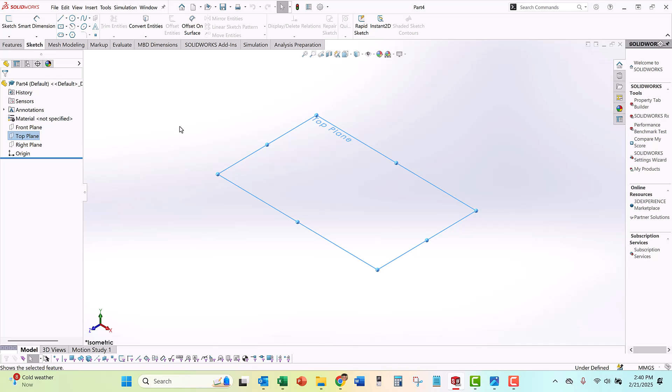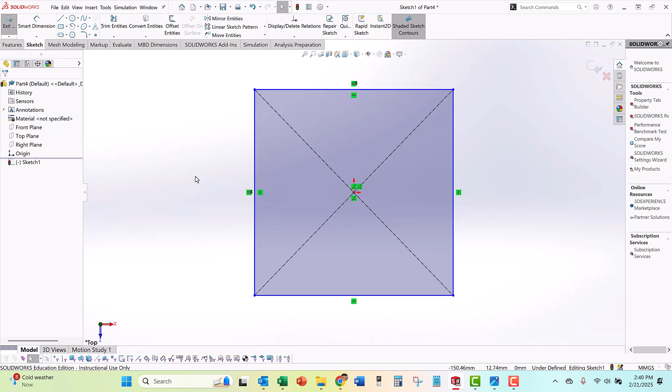So I want to go select this top plane. I want to sketch on the top plane so the part's oriented correctly. And I'm going to go do a center point rectangle and approximate that. And I want these to be a square, so I want to make those 2 equal. So I select one, control click the second one. Now they're equal. Now I don't quite know what size I need yet. And so I'll worry about constraining that later, but I want to make sure I don't forget later. So we'll call it good with that, and I'll get it out of the sketch.

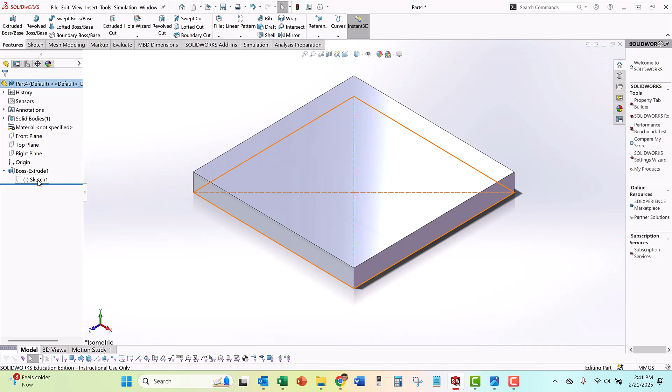And I'll do a space bar and do an isometric view. And I think now I'll extrude it to make my plate. And I'm not sure what thickness is going to be, but I'll pick a thickness and say okay. So like I said, eventually we're going to go back and fix that sketch so it's got the right dimension on there that we want. And eventually I'll assign a material.

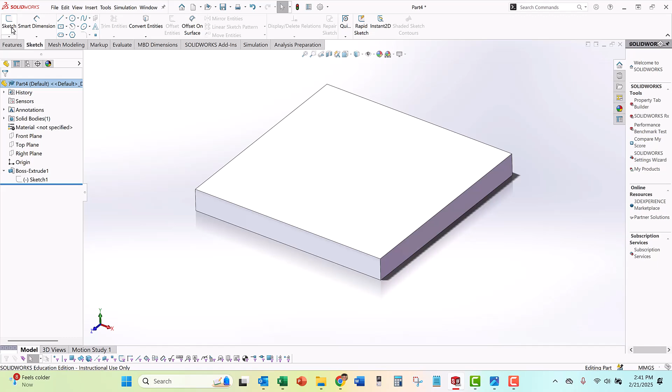Alright, so I want to make a sketch to kind of locate all my features. I got a bunch of holes, and I want to create a sketch that's going to control the location of all those holes. And so I want to make a new sketch. I want to sketch on this face right here, and I want to make me a diameter bolt circle. And that looks okay. And I'm going to make some lines here to help me locate the different types of holes at the different locations.

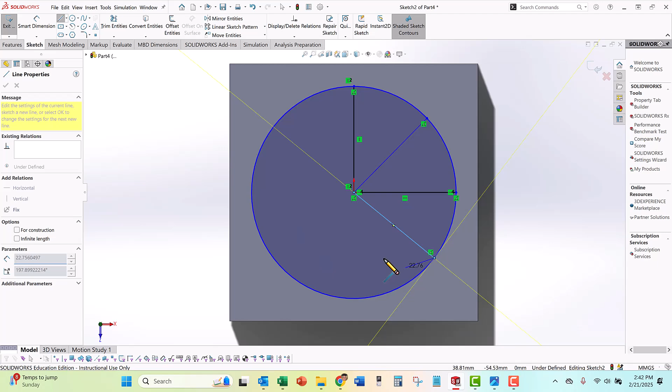And so I'll have a vertical line at 12 o'clock, I'll have a horizontal line at 3 o'clock, and then I'll have a couple of 45-degree lines that I'll use to locate my holes that need to be halfway between those other 2. So I'm selecting, put them at the origin, make sure I tie them to the circle, and so when I move this, they're all moving together, so that looks good.

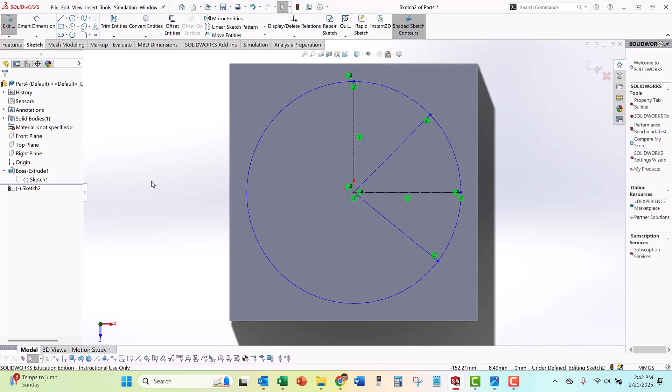All of this needs to be construction geometry, because I'm not going to extrude any cuts or anything. I just want to use it to control other features. So I select one, control click the rest of them, make them all for construction. And again, I don't know what bolt circle size I want, so I'm going to leave that loose for now, but I got to constrain these. I do want to put angles on here. So here to here, this will be a 45-degree angle.

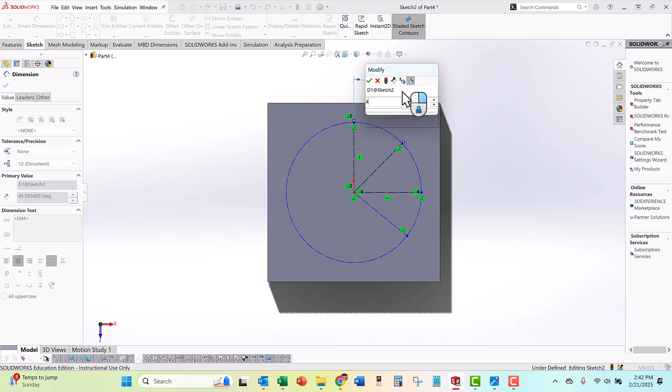And I could do another 45-degree angle down here, but I think I'll do some geometric constraints. So I'll select that line, control click, whoops, got the face instead. Select that line, control click that line, make those perpendicular. So now those lines are fixed. One thing I need to do later is put a dimension on this sketch. So I'll leave it loose for now.

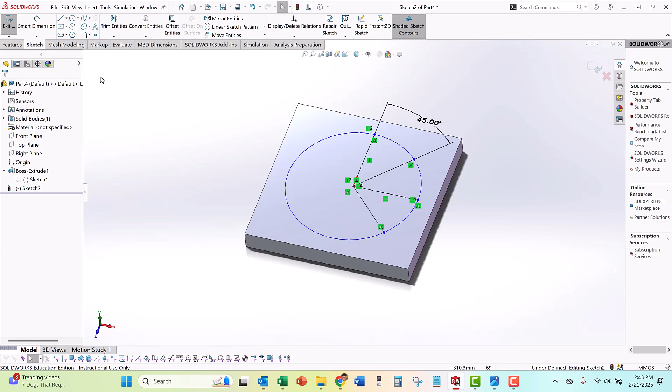Also I want to make a square on here so I can locate those corner pins and the clearance holes for that hex bolt that goes through there. So I want to do one more. I want to look down from the top again, space bar, top view. Do another center point rectangle and select the origin and place it something like this. And again, this needs to be equal to this. Make them equal, also make them for construction. So that looks good.

And so what I've got is a design rule I like to use, which we talked about 3 weeks ago: the edge distance for the holes, you need to keep it no closer than 1.5 times the major diameter. So I want to go ahead and make a global variable to drive those dimensions. And so I want to go Tools, Equations, and I want to call it Edge. And I'm going to look at my hex bolt size, and for mine it's a 12 millimeter screw.

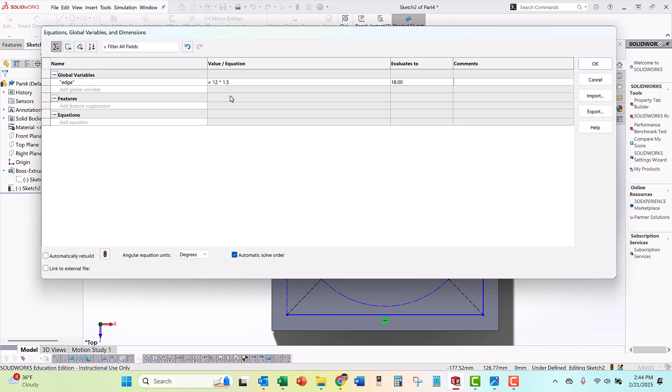So I want to say equals 12, whoops, got too many equal signs, equal to 12 times 1.5, because my major diameter is 12, and I want to make sure the edge distance is at least 1.5 times that. So now that I've got that variable defined, I can go smart dimension, and I can go from here to the edge of the part, and I'm going to type in equals. That'll get this pop up. I'll arrow down to go global variables, and I'll arrow over to the right and select that global variable.

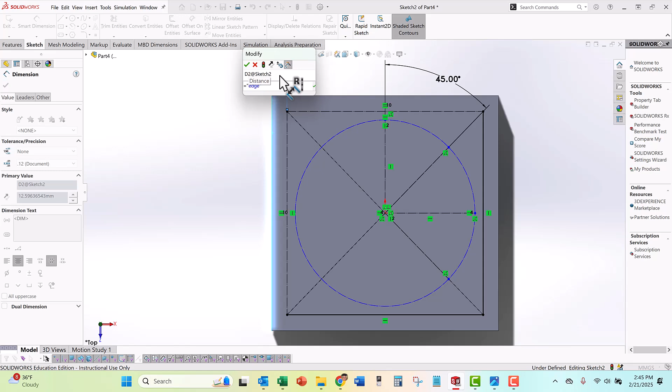So now that dimension, you can see it's 18 now, but it's got that sigma on there. That tells me that it's being driven by that global variable. So I'm going to do that in this other direction here. Again, say equals. Well, that one doesn't need to be on there because it's already defined because these things are equal. So I believe now that took care of the, everything is black.

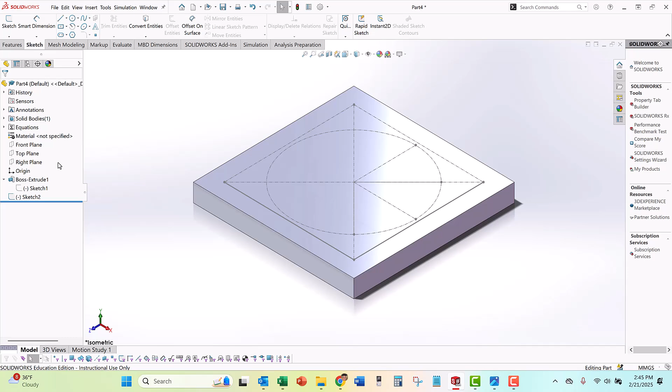The only thing that is not defined is the diameter there. So I'll tie that down later. So I'm going to exit there. So now I've got me a sketch that'll help me control all the different holes I'm going to put on there here in a little bit.

All right, so now let's go ahead and I'm going to say I'm working on the bottom plate. And so on the top plate we had counter bores here and here, 12 and 6. We had countersinks here and here at 3 o'clock and 9 o'clock. And then the threaded holes were on these 45-degree angles. On the bottom plate, that whole pattern needs to rotate 45 degrees so that the holes on the top don't crash into the holes for the screws going up the bottom.

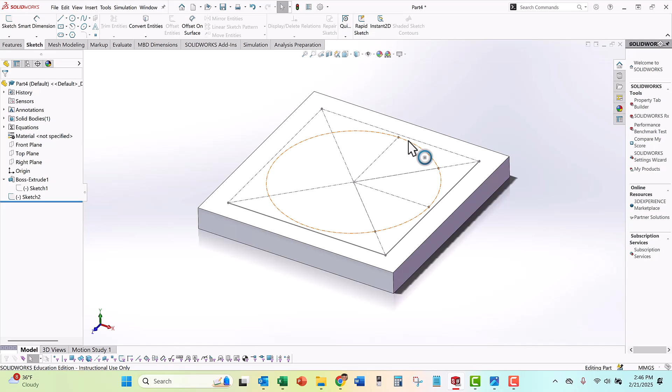So I'm going to start off doing the counter bore hole, and so I'm going to go to features, hole wizard. I always use the hole wizard to make my holes, and my socket head cap screws and my socket countersink head cap screws are both M10 by 1.5. So I'm going to go to hole wizard. I want to have a counter bore hole for a metric socket head cap screw. Make sure you choose the right option. Size on mine is, what did I say, M10. And we want it through all.

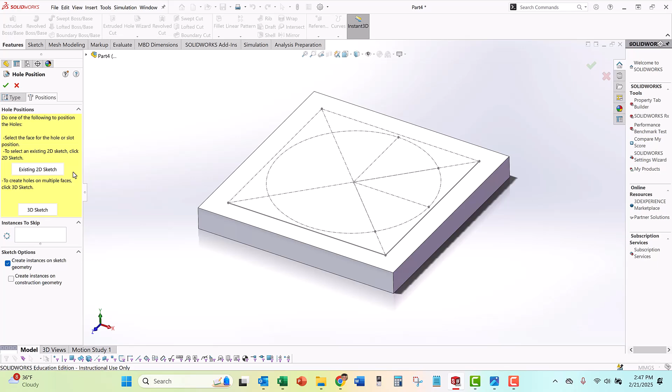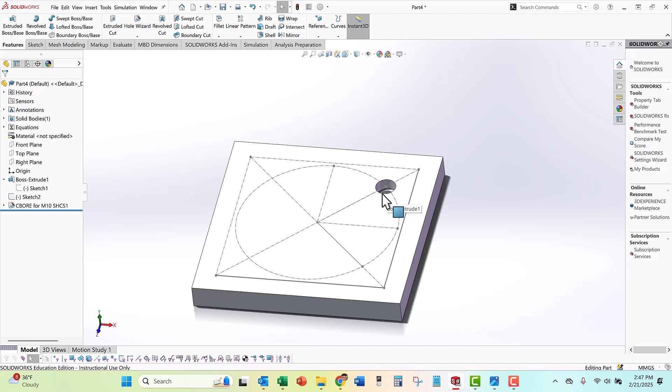So now I'm done with that. So I'm going to click on positions. Don't click these buttons over here. Just click on the face you want the holes to be. And instead of being at 12 o'clock, I want to rotate it 45 degrees over this way and grab that point right there. And say OK. So now I've got my counter bore hole for my socket head cap screw. And I'll do a pattern here in a minute to get that wrapped around.

Now I'm going to do the countersink hole. So I'm going to go back to hole wizard. I'm going to change it to a countersink option right there. I still want metric, and I want a socket countersunk head cap screw. And it's still an M10. And I don't know that I forgot to choose the fit last time. I need to check that first one, make sure I got the right one. On mine, it happens to be loose fit.

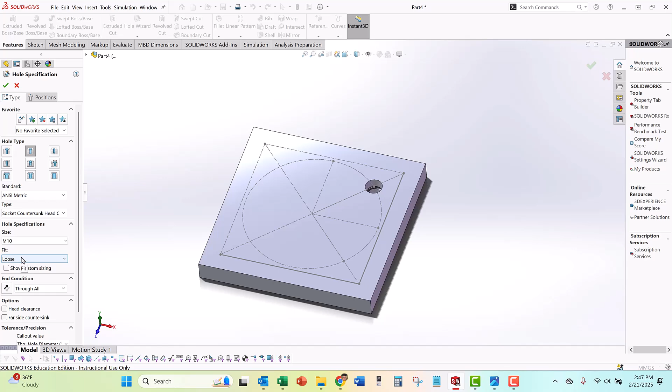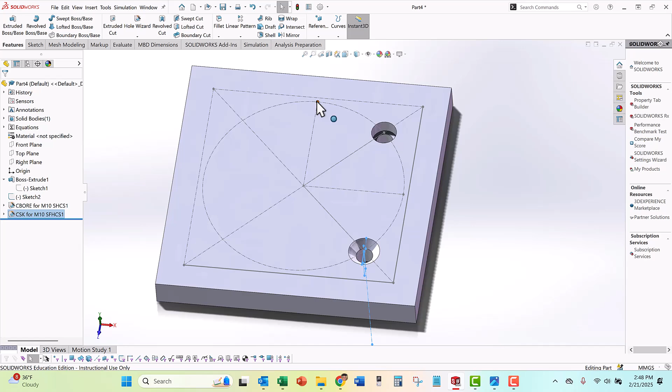And so that's correct. Through all, positions, select that face. Now I want to choose that point right down here, which is 45 degrees away from where it is on the top plate. So now I got that one. Now I'm going to do my tapped holes. And so the tapped holes are going to rotate 45 degrees over here, and it'll wrap around. So I'm going to put a tapped hole up here and then do a circular pattern for 4 of them to get them all the way around.

So I'm going to go back to my hole wizard. And what did I say? This is going to be an M10 by 1.5 threaded hole. So I'm going to choose threaded hole, ANSI metric. I don't want bottoming tap. I want just a plain tapped hole. And the screw size is M10 by 1.5.

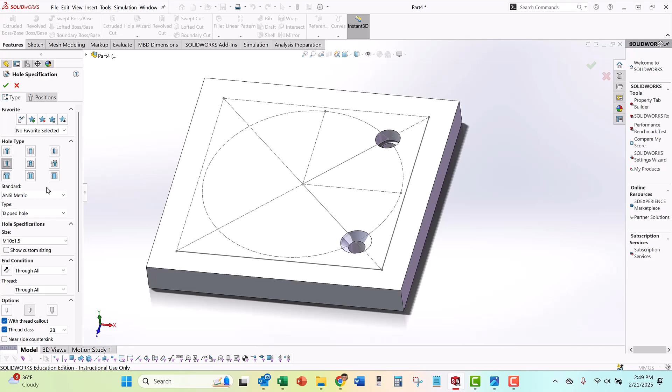And we need to make sure we do through all, but we also need to make sure this middle button is pushed in. With thread callouts, yes. Thread class, yes. Don't click this near side countersink. This will be giving us our notes we need on our drawing eventually. So that defines the hole. I go to positions. Again, I select on the face I want to place it, and I want to click right there. And I'm just double checking to make sure all these sketches are fully defined, fully constrained, which they are.

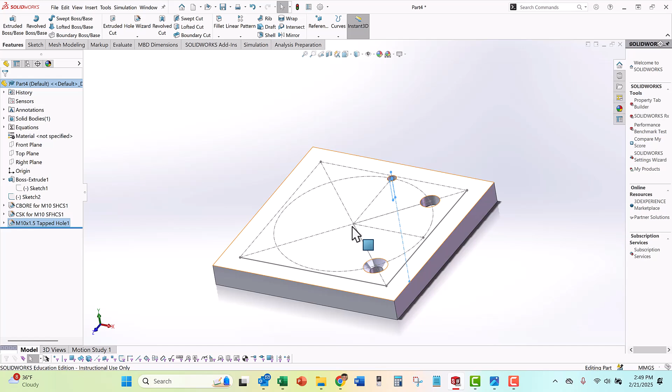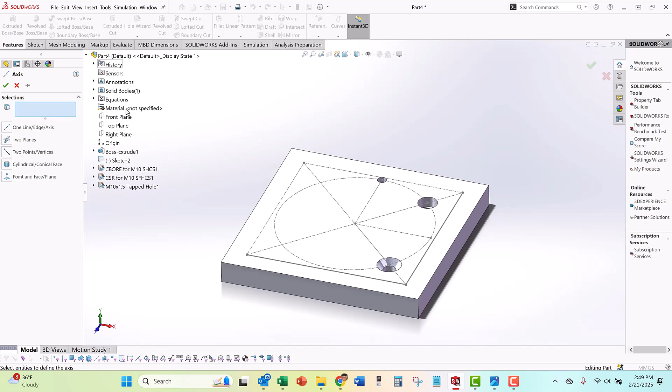So now I need to make me an axis so that I can do a circular pattern. So I need an axis right in the middle, which is going to be an intersection between these two planes. So I want to go to Reference Geometry, Axis, and I want to open up my tree here, and I want to say intersection of the front plane. That puts it in the blue box, and control click the right plane, and that gives me a little preview down here. If you can see that little yellow preview, that's going to give me an axis right through the middle of the part. So now I'm ready to do my circular pattern.

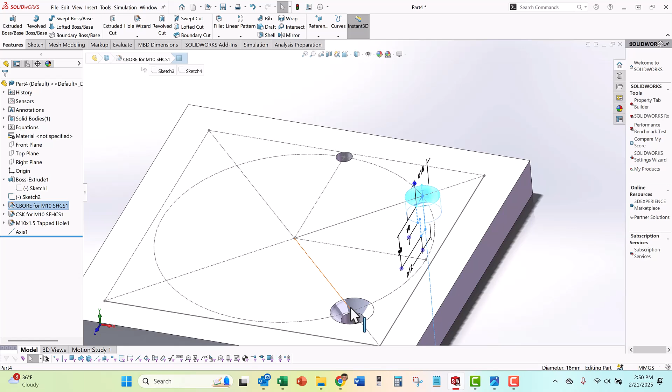These two guys are going to rotate 180 degrees. So I'm going to select the first one, control click the second one. I want to do this circular pattern together. So I've got them selected.

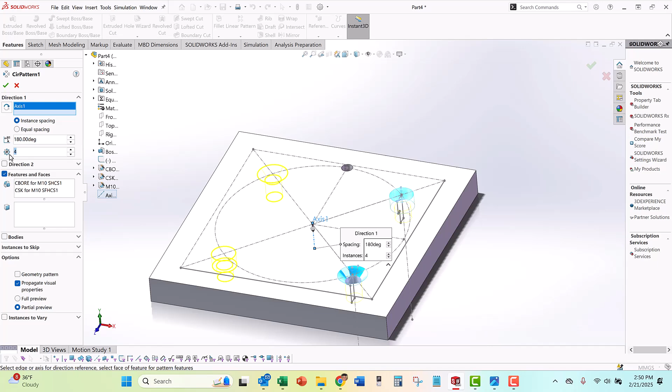I'm going to go to linear pattern, use the pull down, go circular pattern. The blue box is active, and it's asking me for the direction. I want to choose that axis, choose 180 degrees, and I want 2 of them on each.

That'll give me what I want. Now I need to do a circular pattern. Whoops, my threaded hole is not showing as a threaded hole, so I need to turn on visibility. Use the pull down, turn on that annotation button, then the pull down on the eyeball there. Now I've got my threaded hole - it was just a display issue before I made that change.

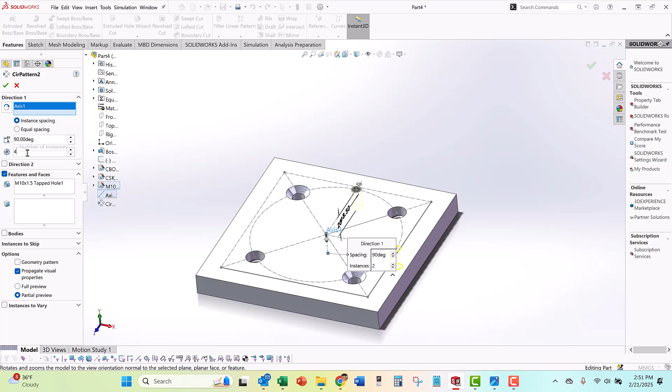Now I've got this guy. I want to do a circular pattern on him, except I want 4 of them. So I'll use the pull down here, linear pattern, choose circular pattern. I'm going to choose that same axis to rotate about, and this time it's 90 degrees, and I want 4 of them. That gets me all the way around the horn there.

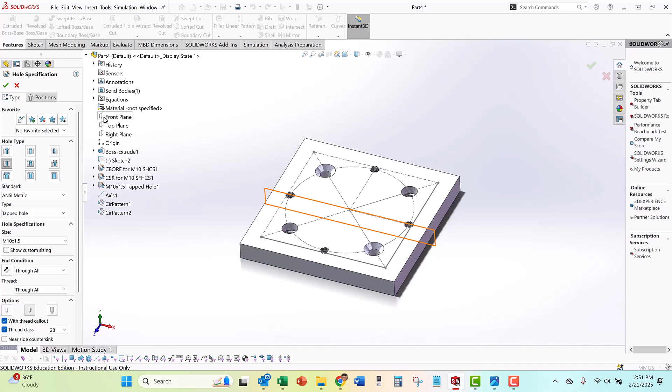That looks good. Now I'm going to add in my 2 hex bolt clearance screw holes. I'll go back to the hole wizard, and looking at my spreadsheet, my hex head bolt is an M12 by 1.75.

So I'm going to go to a plain hole, ANSI metric. I want a screw clearance hole - this is going to be a clearance hole for that, in my case M12 by 1.75. I want a clearance hole, and checking my spreadsheet, it says loose fit, so I'm on loose fit there, through all.

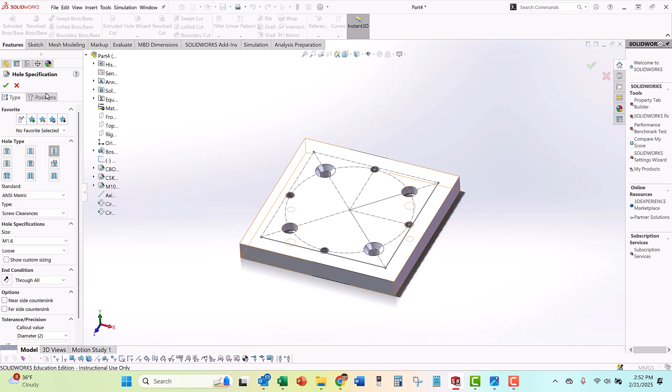That looks good. Now I want to go to positions. Again, select the face, and I want one up here, and one down here.

What in the world happened? Oh my gosh, it didn't give me the right size. I want to edit this - I got them in the right spot, but I chose the wrong one. Right click, edit feature. I want an M12 - oh my gosh, that was wrong. M12, that looks better. Through all, screw clearance M12, I'm good, and it's loose, which is what I'm assigned.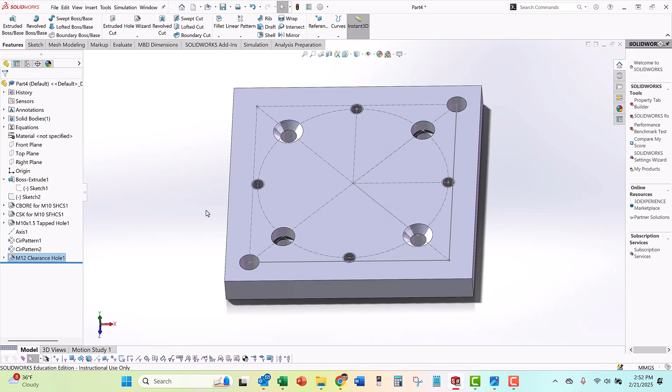All right, now we can do the other side. We need dowel pins over here and here. These are going to have different tolerances, so I can't do them both at the same time. They're both nominally 12 millimeters in my case, but I need 2 separate features so I can individually change the tolerances when we start doing the drawings next week.

So I'm going to go back to the hole wizard. I want a plain hole, metric, and I want to choose dowel holes because these are for those dowel pins. The size of mine happens to be 12 millimeters. Through all - no, don't turn on these countersinks, near side or far side.

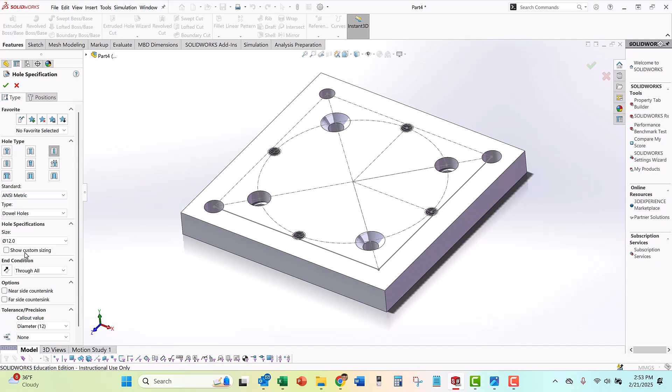Positions, select the face. I'll put one up here, say OK. Do it one more time - hole wizard. I just want the same values as before. Go to positions, click on that face, and boom, right there, OK.

So now I'm done. Should have saved this thing - I haven't saved it yet. So make sure to save yours on a regular basis.

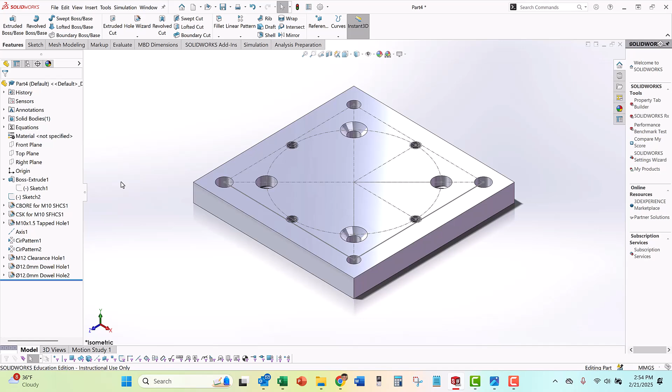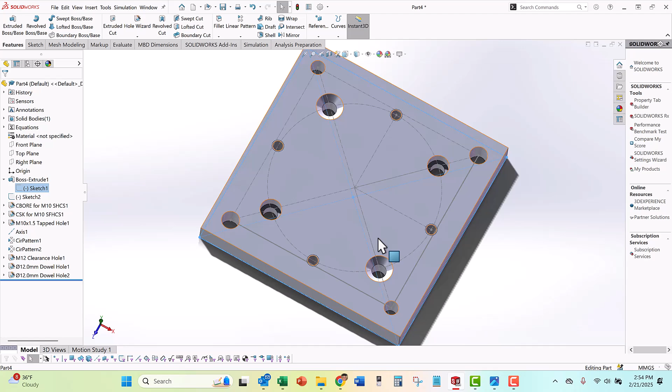I think that's about it. I still need to go back in and edit the sketch to locate the real diameter and real size of the plate. This looks pretty good - the design looks okay, the holes aren't too close, I don't think. So I would just go in and fix this sketch, add a dimension for the location and size of the plate, make it a nice round number. And in the sketch here, I want to add that dimension for the bolt hole circle and get it a nice round number.

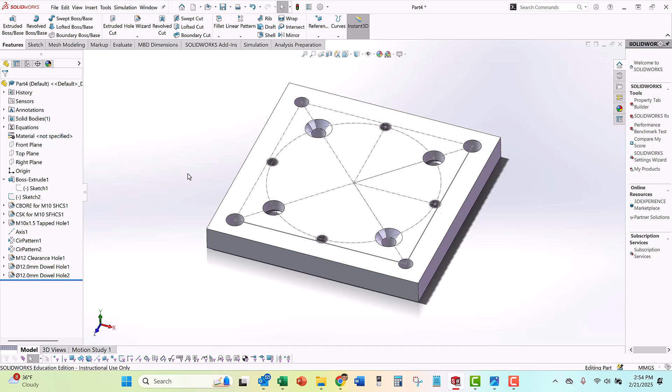And then my part's done, and I'm ready to move on to do the drawing. I guess one more thing before I do my drawing - now that I've made my part, I like to hide this sketch so it doesn't get in the way later when I start doing my assembly model. So I'm going to right click.

Oh, I see a problem here. I didn't make this a construction geometry here or here. I need to fix that, so I'm going to right click, edit sketch. Yep, I missed that, didn't I? Right there.

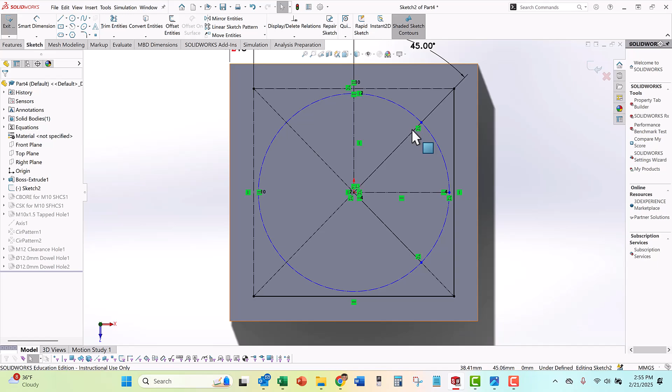Control click that one, make that construction. There we go, I think I got all of them now. That's fully defined - no, it's underdefined, because of this guy. So I'll put a real smart dimension on there later once I decide what size I want that to be.

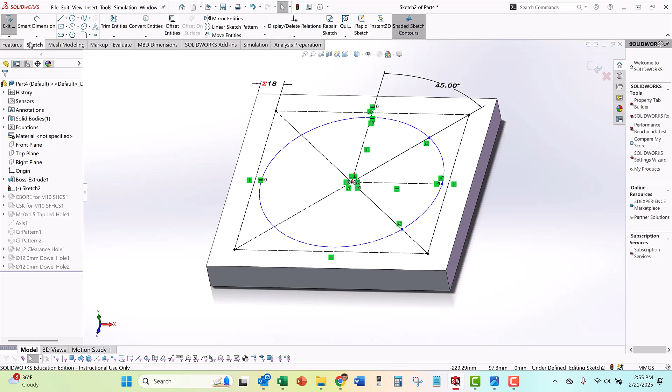Exit that, spacebar, ISO view. All right, so now I've got my orientation correct - there's front view, top view, right view. So it looks good. Hopefully that was helpful, and we'll follow this up eventually with a video talking a little bit about doing the drawing. So until we talk to you next time, have a good day.